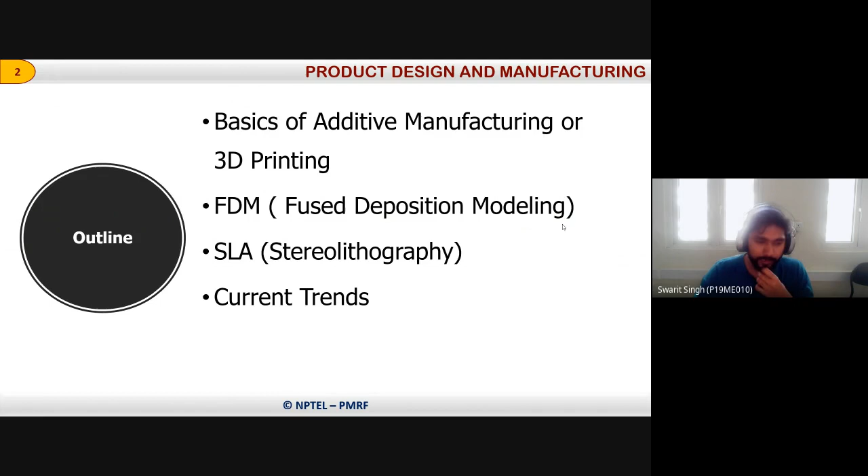So these are the basic outlines I'm going to cover about additive manufacturing. We'll see the basics of additive manufacturing and 3D printing, then what is FDM, fused deposition modeling, which is very common and popular. Then we'll see about SLA, and then the current trends, how the research is going, and what the current market of 3D printing looks like.

The first step involved in additive manufacturing is preparing a CAD model. For preparing the CAD model, you can use any CAD drafting software including SolidWorks, Creo, AutoCAD, or Fusion 360. If you're using an online tool, you can use GrabCAD or OnShape. OnShape is one of the online drafting software which hosts these CAD tools.

The CAD model can also be obtained from 3D scans. If you have any component and want to do reverse engineering, you can scan that component into a 3D model and process it. With the help of 3D scanning, there are different kinds of scanners available, like blue light and white light scanners, which are laser based. They scan the component and create the same part. So it's a reverse engineering kind of thing. If you have a component and need its 3D model, you just scan it and you will get the 3D structure of that particular thing.

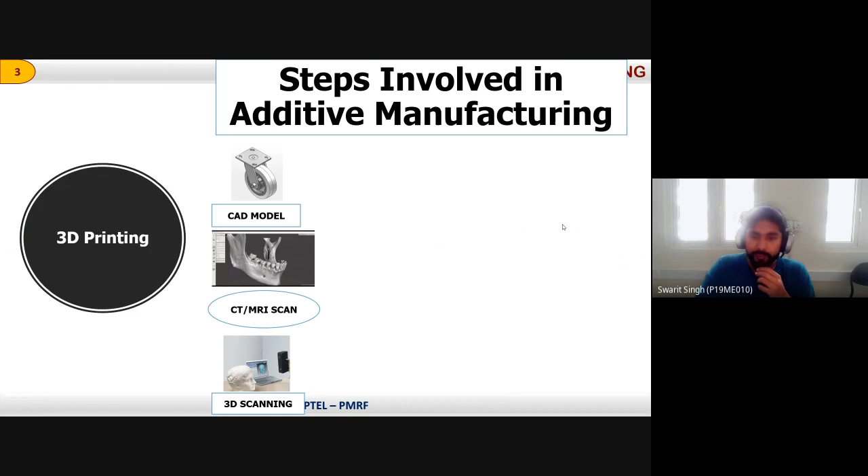Then from there we have to create a tessellation model. There's a file format to save that particular CAD model, and those models are saved in particular formats. For 3D printing, it is required to tessellate the model and save it in an .stl file.

So the file with .stl extension is standardized for usage in 3D printing. Why only that? Because we have to do the slicing of that particular model, since additive manufacturing is a layer by layer manufacturing process.

So we first deposit one layer, then over that we deposit another layer, and so on. Is this done by CAD software like CATIA?

Yes, yes, yes. In any software, when you go to save the model, by default it is something like dot obj. But once you see the save as option, you will find that the dot stl format is there.

Dot stl format is always there in any of the CAD tools. In CATIA also it is there.

So from there, after saving as STL, we slice this model. This slicing is done in the software which comes with the 3D printer, so the slicing is performed there.

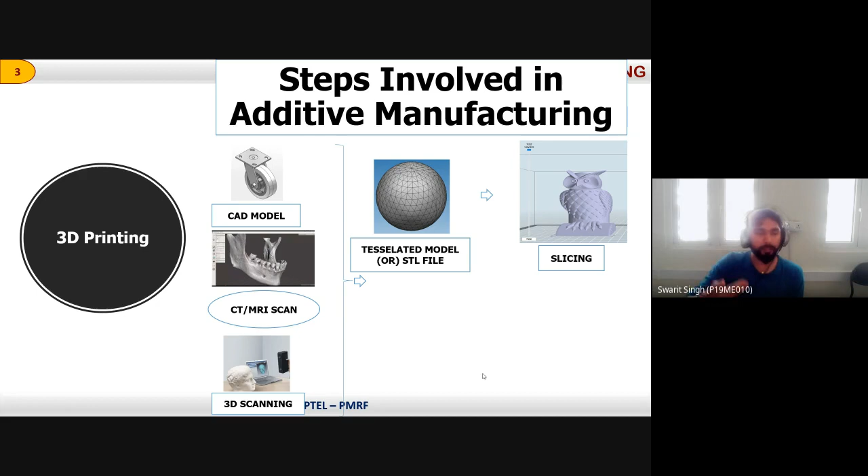Then after slicing, the job is passed to the printer, and it starts printing the component. So this is the overall set of steps involved in any additive manufacturing process.

Then after 3D printing, or after doing the additive manufacturing, we have to do some post processing for final finishing, like removing the support material.

We have to remove any disparity or problem with the printed part. Sometimes extra threads or extra material may be deposited, so we do some small finishing operations to produce the final part. It's a very minimal task.

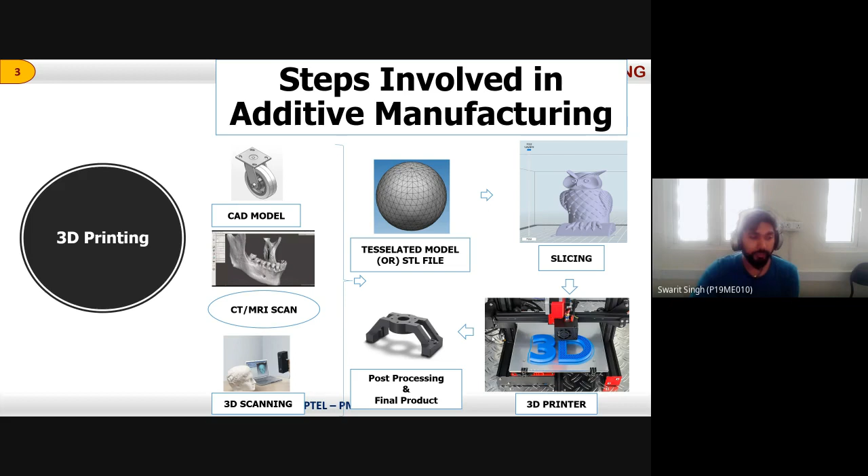Sometimes if the printer is very high end, you do not need to do all these activities. But for making the prototype or component very perfect, we usually do some post processing of the final product.

So as I said, it is a layer by layer manufacturing process. So suppose if you have to manufacture...

Someone has raised their hand.

So if you have to manufacture a component which is a hollow structure, okay, or what kind of structure... let me show you.

Suppose if you have to 3D print this. You can see this feature has a smaller diameter, and this one has more diameter.

This is a larger diameter. Then there is a hole here. This hole, there's a hole here.

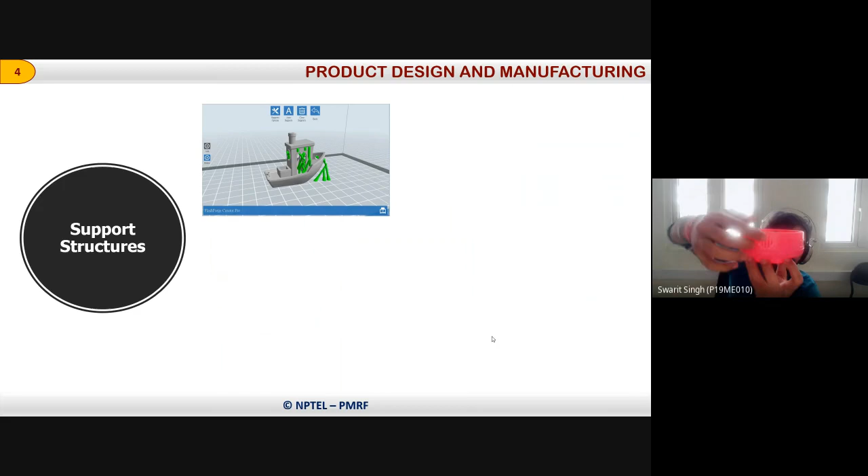So if you go for 3D printing... sir, I think we are on your slide. Are you showing some cursor or something? Yes, yes, yes, it was not visible sir, it was a plain slide.

No, we still cannot see the cursor, sir. No, not the cursor, I'm showing a video. Sir, we are still seeing the slide. That's the problem, so I think you have to share the screen rather than the app.

Okay, now the video is visible, right? Nikhil, you have to pin it correctly so the people are visible. Just see me, is my video visible or not? You have pinned the slide one.

Two of my profiles are there, one is the PPT, which you have pinned so it's only showing that on screen. The next is my video, so just unpin that so it automatically changes from the PPT to my video.

There's a pin option, yes. Now I can see the flask you are showing. So can you please repeat, sir? Sorry.

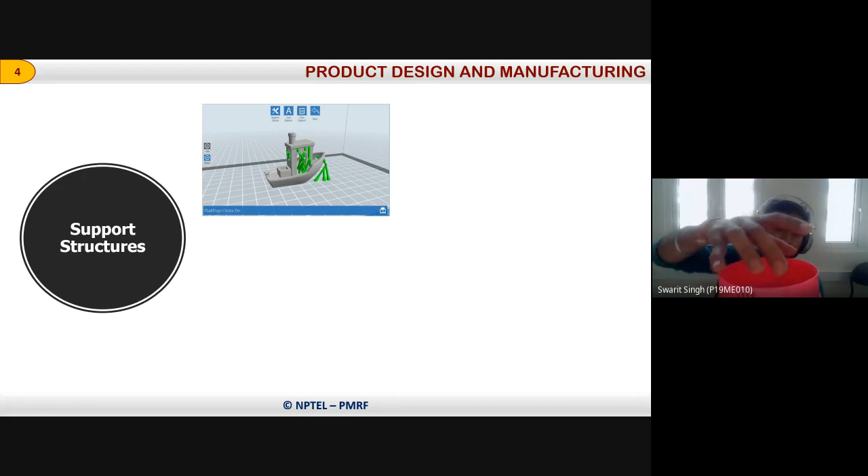So you can see there are certain features here, right? One feature is here, having a small diameter. Then another feature is here, having a larger diameter than this. And then these are the holes, visible here, this is a hole.

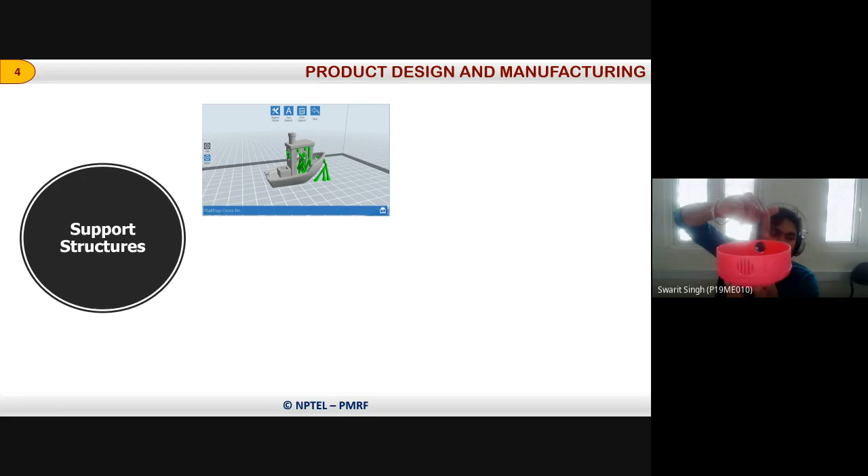So if you make a CAD model for this and pass it to an additive manufacturing machine or 3D printer, it will start printing. It is a layer by layer manufacturing. So it will first print this particular layer, then over that it will print another layer, because we have sliced it.

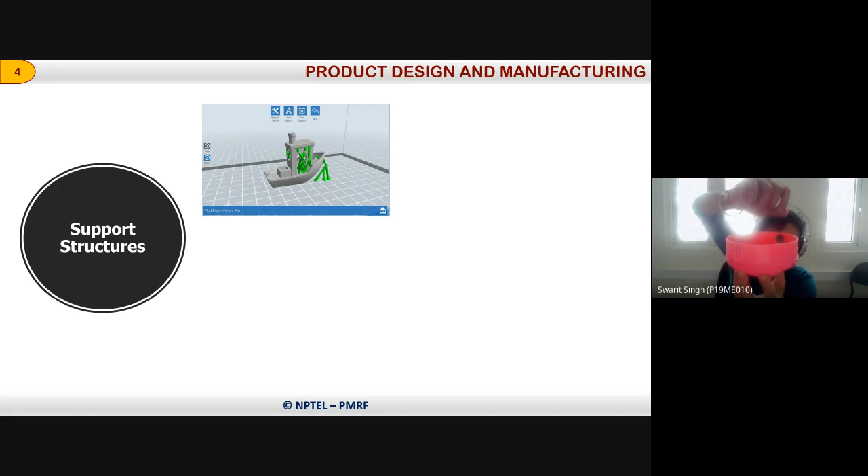Once it comes here, there is a whole overhanging part. This is the overhanging part. It's just like a nozzle, something we are dropping from the nozzle and it is getting deposited on a surface. But here there is no base, so it will again drop at this bottom level, and it will start depositing the model here only.

But when we do additive manufacturing in 3D, this does not happen. So what happens here is there are two kinds of material in any printer: one is the support material, and the other is the main material - the material of the component which we are going to use for manufacturing our component.

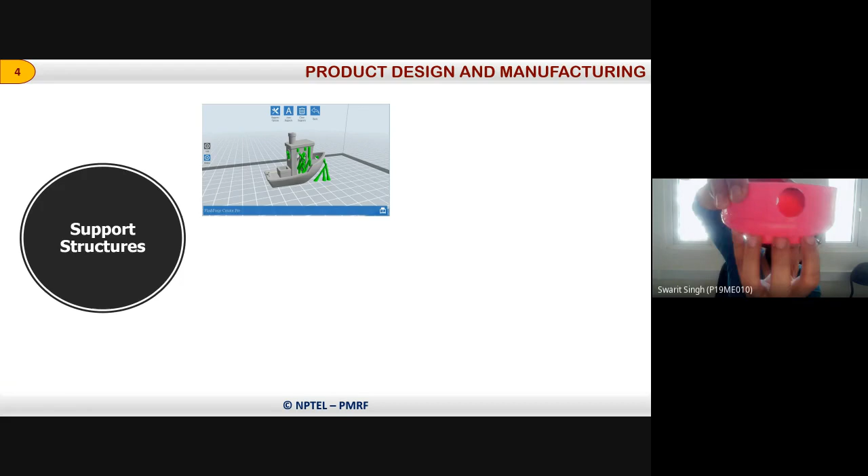So at the part where support is required - here what we require is support, some support up to the final level of this structure, this smaller diameter shape. So up to here, this part will be printed as support structure.

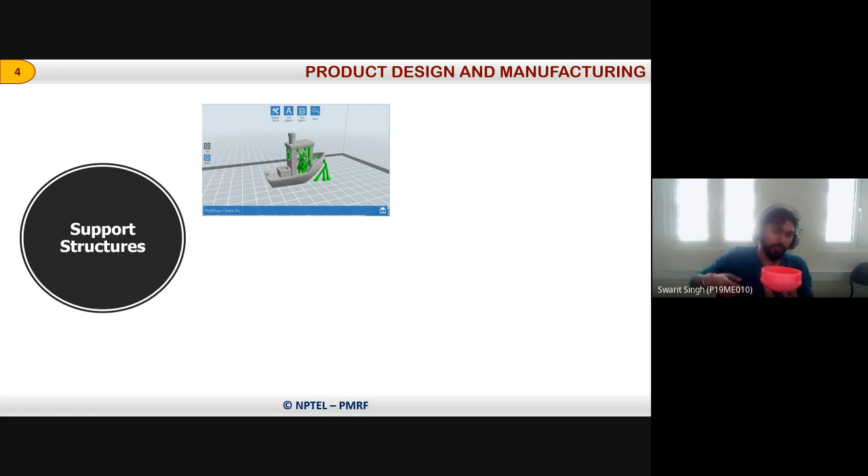So when you see the printing of this, you'll find that the outer circle will be with the support structure and the inner circle will be the main material, up to a certain height. Then the main material will come into action and print. Later on we'll remove that support material and get this kind of shape, right?

So did you understand what I'm explaining, how it happens in the 3D printer? Or is there any confusion still remaining? Hello.

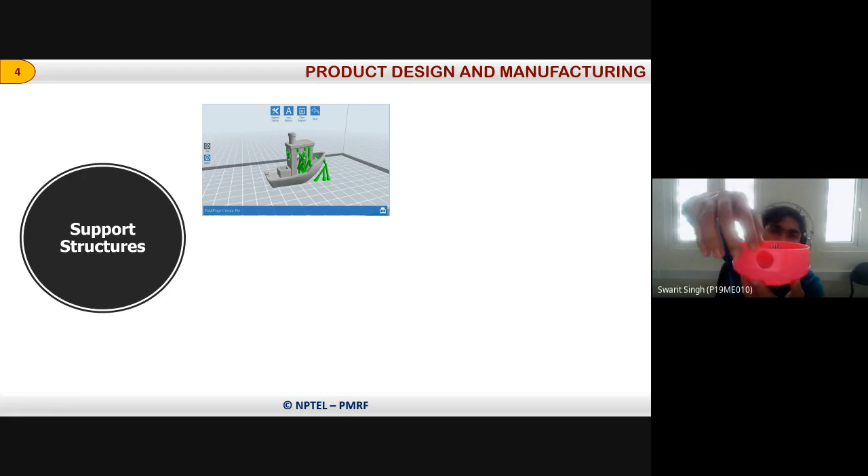No confusion, sir. Okay, so the same problem will happen here, this part. Again, we are depositing at this layer. So what will happen after depositing at this height? There is some hollow structure. So how will you go to print this? If again the nozzle comes here, it will drop the material down because there is a hollow structure.

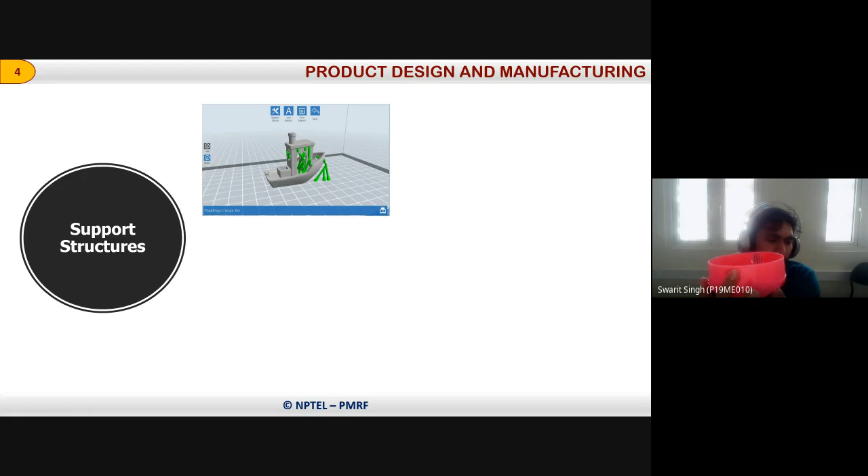So for this also the support material will be here. It will be filled with the support material, and then the main material will come here, and later on we'll remove the support material, right?

So how will we remove that circle, like the support material? The support material is very easy, you can break it with the help of some tool. It will not be stuck with the main material - it is a mesh kind of structure, just for support, not very strong.

Strength wise, no? Yeah, strength wise, it will be very porous kind of powder structure. Sir, can we reuse it also for the next print? No, so that will be a wastage.

People are doing research nowadays to reutilize that. In IIT Gandhinagar, one of my friends is there - he's building some technique so that all the wastage, like in 3D printing the wastage in terms of support material is very high, can be recycled and then used again for another printing operation or something like that.

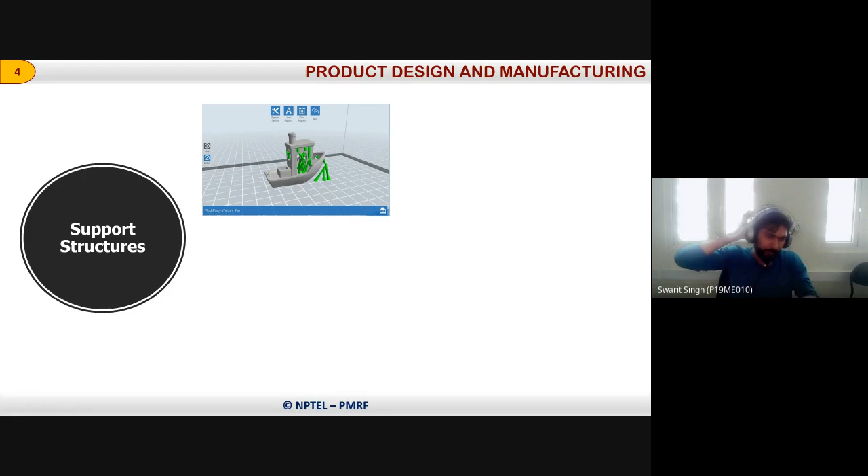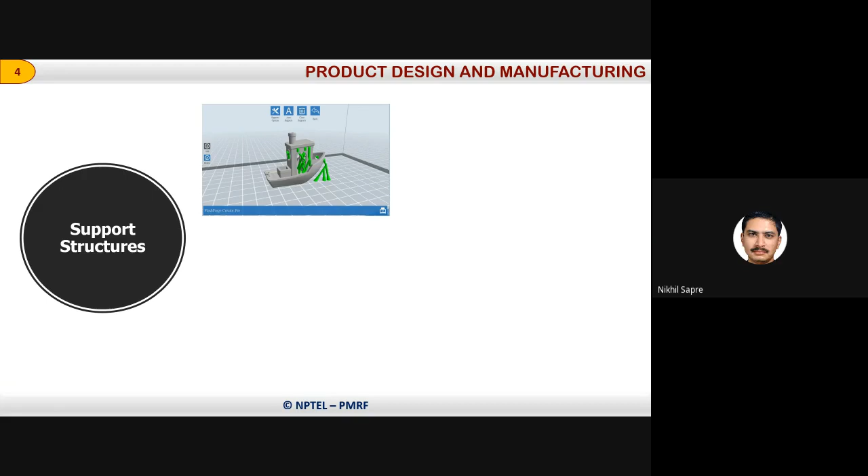Ideally sir, support material can be something which is not very costly, like even sand kind of material, so that even if it's wasted it's not a big loss. Yeah, so people are doing some research in this field.

While making structures for civil architecture, like chairs and tables, there is recently news of researchers from IIT Guwahati - again one of my juniors - they have incubated a startup from IIT Guwahati, and he is pursuing his PhD from there.

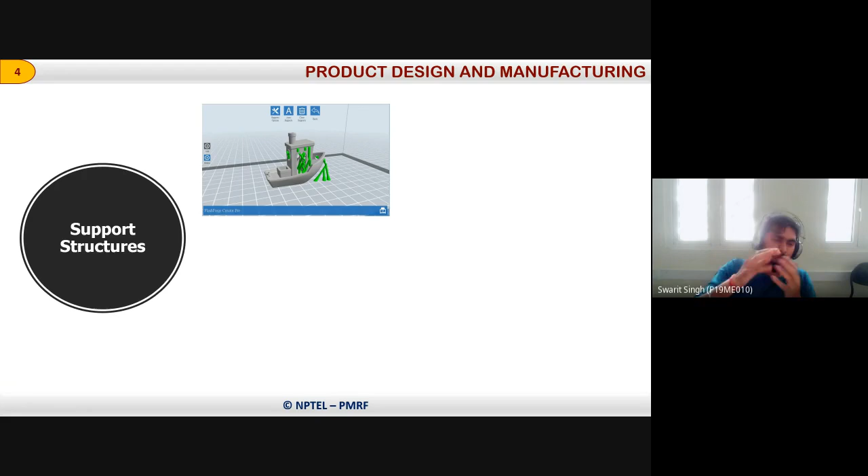So he with his friend and some other faculty members have built the concrete structure. There they have used this sand kind of thing for support material in those kind of applications.

For this ABS, people use that plastic only. Low cost plastics are there, like ABS materials. So for that, support structures are required. Here in the figure also you can see, if you have to print this kind of overhanging parts, the green parts are the support structures or support materials deposited there.

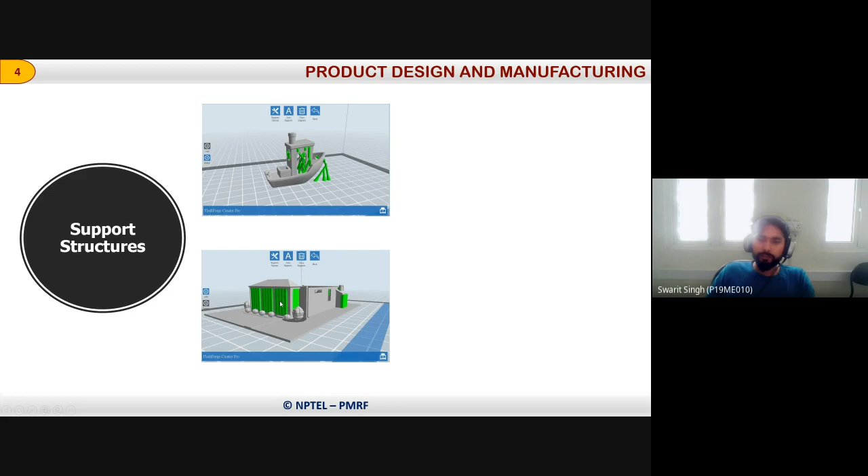Here you can see when you are making a model for home, for windows, for these pillars, these green materials are the support material that is printed, and rest are the final original materials.

That support material needs to be removed after the part is completed and cools. It is not easy to remove - once the part is completed, after taking the part out, you can just remove it, but it becomes difficult later on because it gets solidified. There are certain tools which are supplied with the machine only.

Some similar tools that people use for pedicure, manicure - those small instruments are there, so you have to just do extra effort, extra work for removing that, but it definitely gets removed.

So this kind of structure is initially printed, and then later on we just remove this kind of structure. These are the support structures. We just break it and rub it with the tools that we have, and then we get the final product.

Next, there's a slicing process. Similar slicing process you can see at your home - suppose you take a potato and then chop it. So similar kind of slicing process is this software does with the CAD model that we supply. We provide the CAD model and they slice it in layers.

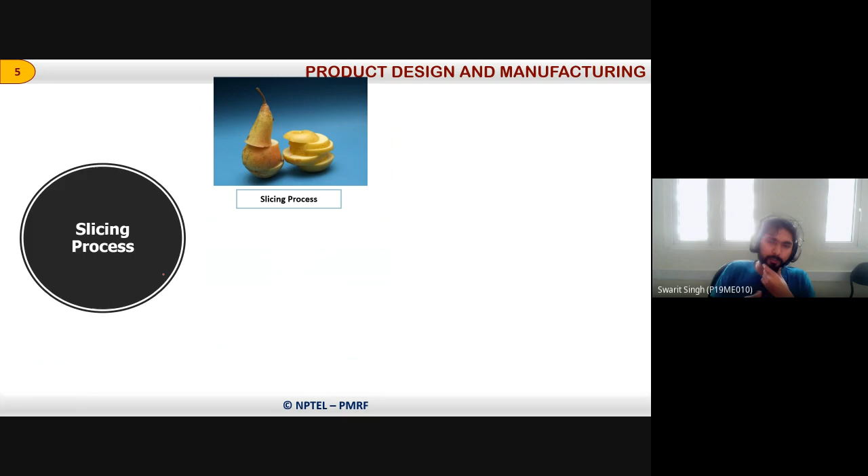There's a CAD model, and it is sliced from here - one slice, two slice - this slicing is very small. The gap between the slicing is very small, but it is sliced in certain slices.

Then automatically the software takes the path, notes down the path where it has to deposit the material, and then the sliced model is sent to the printer.

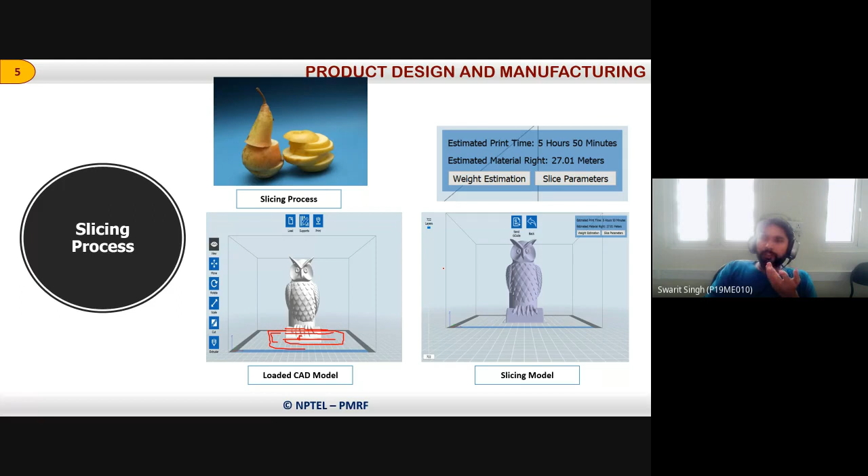Before sending it to the printer, the software is capable of estimating the time, estimating the material - like how much support material is required, how much main material is required, and like this. Then weight estimation and everything should be done.

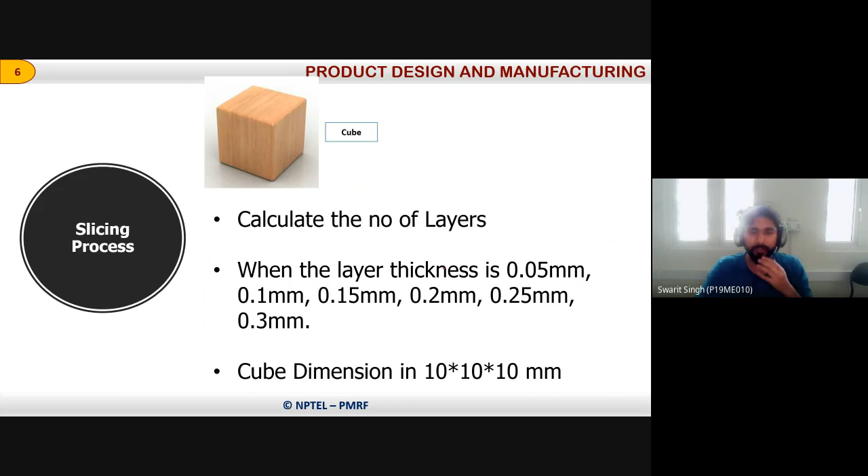Then we have to calculate the number of layers and thickness of the layer. More fine layers means the appearance of the object or component will be high, and then we require a more precise printer for that. So based on the application, we choose the layer thickness - it depends. And based on time also, if we want to complete the part as early as possible, we have to increase the thickness of slicing.

This transformation we have to do as per requirement. Every time it is not required, but if we are going to use this 3D printed component as a final product, then you have to do some post processing. Otherwise, if it is only for prototyping, then this 3D printed part is only fine, right?

Next, the very popular FDM technique - fused deposition modeling. This is a type of additive manufacturing technique. Most of the printers, if you search on the internet, on Google, you will find this kind of printer for less than 30,000, or maybe less than 20,000 only - those are FDM printers.

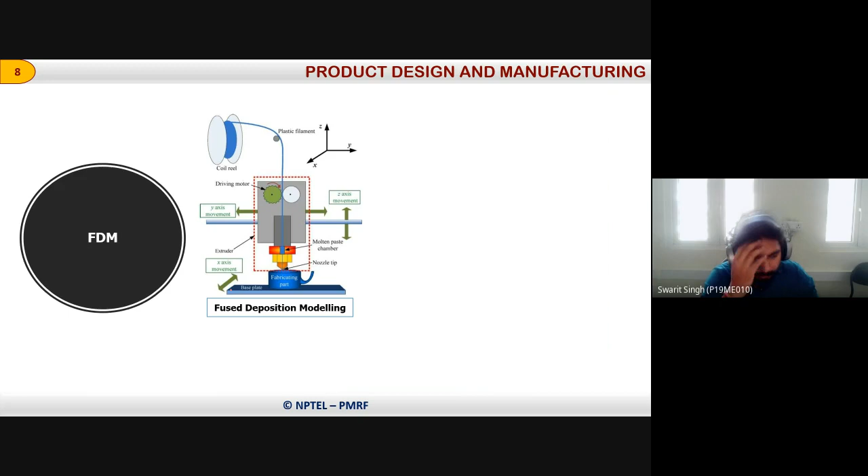They use this material in form of a reel - reels of this ABS material, this kind of plastics. It is fed to the nozzle. Before the nozzle there is a heater - this band heater is there which heats that material. And up to what temperature we have to heat that material?

Melting point - it's about 0.5 degrees Celsius more than melting point. Why 0.5 degree more? Because it should be in molten state so that it can easily flow and be deposited in layers, so it's easily able to construct it. After coming from the nozzle, it does not instantly get cooled. It comes in the zone of melting temperature because it has to pass the band heaters and then travel this distance, so we have to give some extra heat to it so that the cooling process accounts for this.

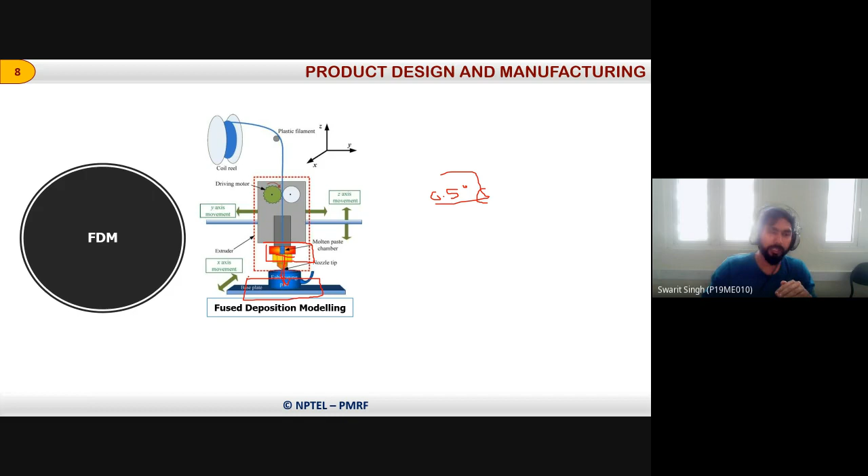Then there's a base plate also in every printer, a standard base plate over which this material is going to deposit. It is a property of that base material that this material does not get stuck with it.

So in some printers, to solve this issue of the original material sticking with the base material, first a very fine, porous layer of support material is deposited, and then the model starts building over that. This way it is easy to break and separate the base plate from the fabricated 3D printed component. So this FDM is very popular, and this is a typical structure.

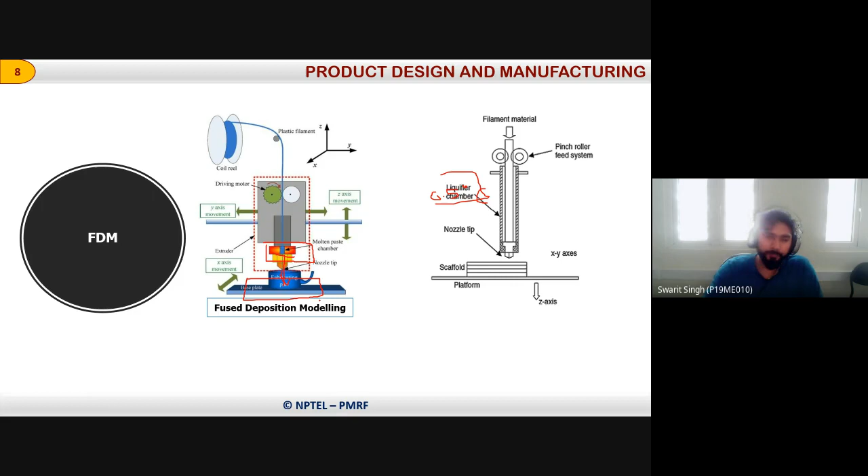In India, there are a lot of researchers who have made their own kind of FDM printers. Some have used pellets - this is what they did.

Instead of providing the material in form of a coil, they created material in the form of pellets - small balls, very small balls of this material, called pellets. Then they feed the pellets into a hopper kind of structure, and again there is a heater which melts those pellet balls, and then the same deposition process is performed. So there are lots of people who do this kind of research, and they play with the material and its properties.

So instead of filament, they are putting ball kinds of structures - spherical, pellet-like. It's a very tiny, tiny particle of the plastic or the material.

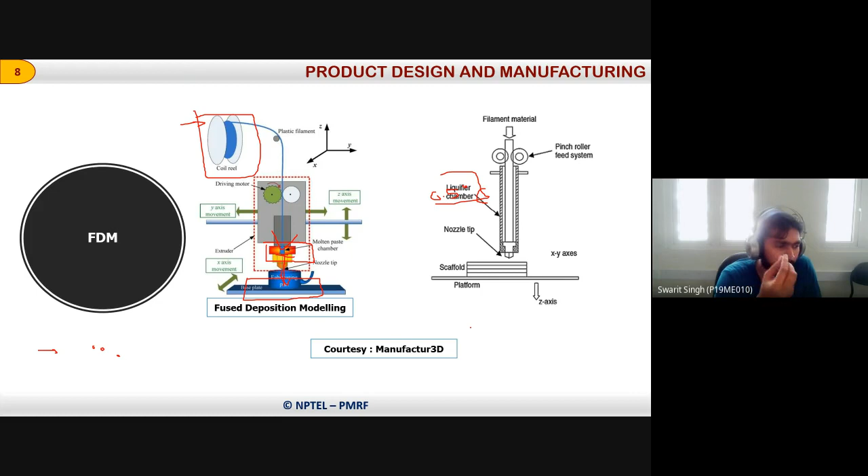Sometimes it's commercially available in the market now since it has become popular. But suppose sometimes you want to print some specific material with the property that you want - so you have to make it yourself.

You mix some powders, melt it, and then make it in the form of small pellets that you can cut. It basically looks like sabudana - small balls, just like sabudana. So you prepare that same kind of material for any specific material, feed it to the hopper, print it, and then perform the testing and everything.

So this kind of structure is printed with the help of this FDM printer. I have one structure I can show you.

So these are all the parts that we have printed with the help of the 3D printer that we have. This is one, then this kind of bell you can see - for this, inside there was the support material base. These are all the components printed for demonstration in the additive manufacturing laboratory for undergraduate students. This you can print - there's a keychain kind of thing, with the roll number of the student.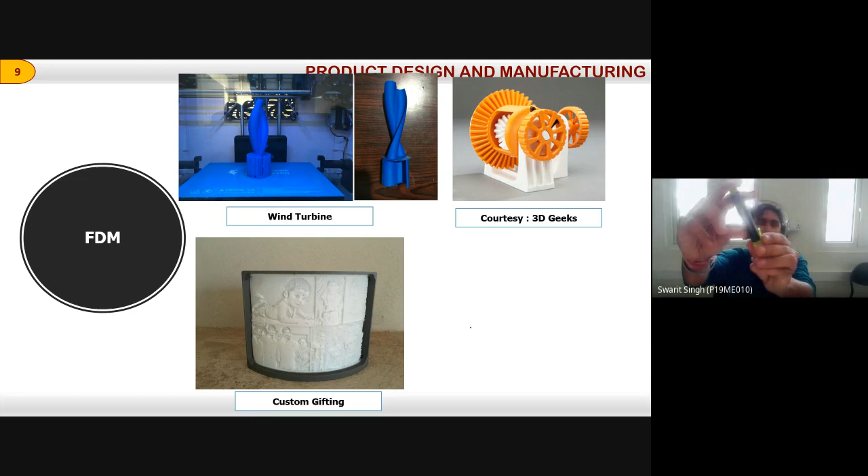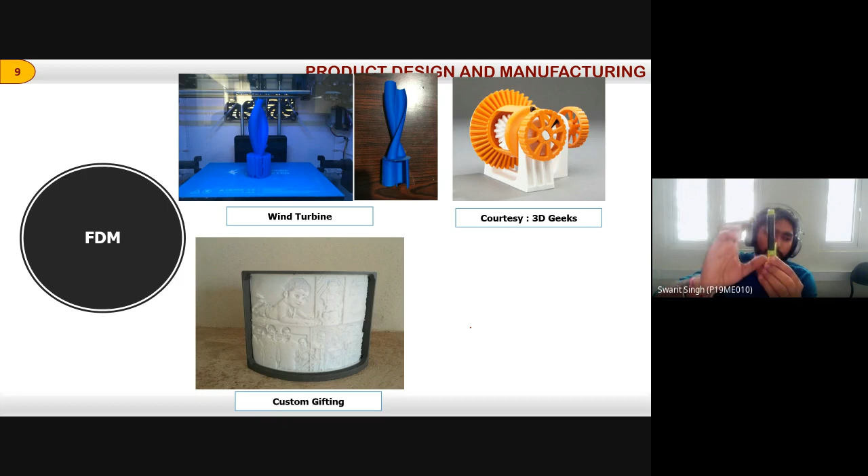Yes, because here comes the mechanics. If we print it like this, there are chances of bending this structure, because it is getting deposited, and there may be some load while cooling. After printing, the cooling of that material will happen, so if it is non-uniform, it will bend, and then again it will be printed layer by layer, with different numbers of slices.

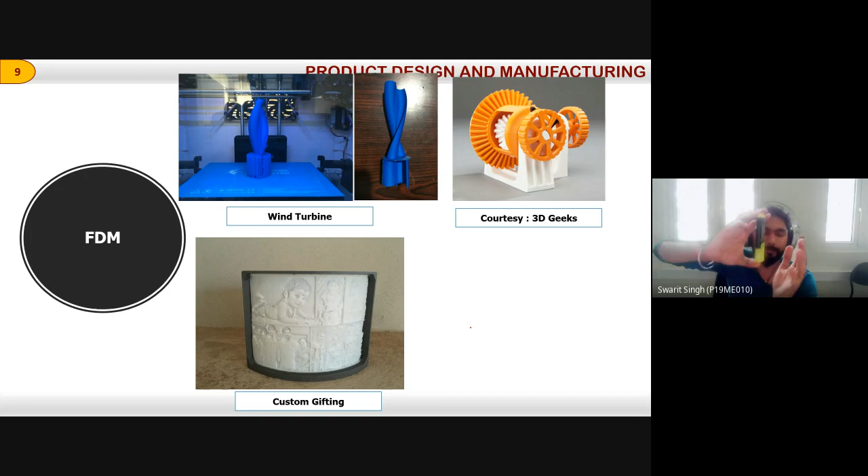It will now consume more time - no, not in terms of time, in terms of strength. If you're cutting it like this, you have to slice it this way; if you're printing it like this, you have to slice it that way. Here you have to slice it into maybe 10 more parts, but here you'll be done with two or three layers. Maybe 20 versus 100 - that will be the ratio. So this is the thing, and then it depends on the application of the component you are going to use.

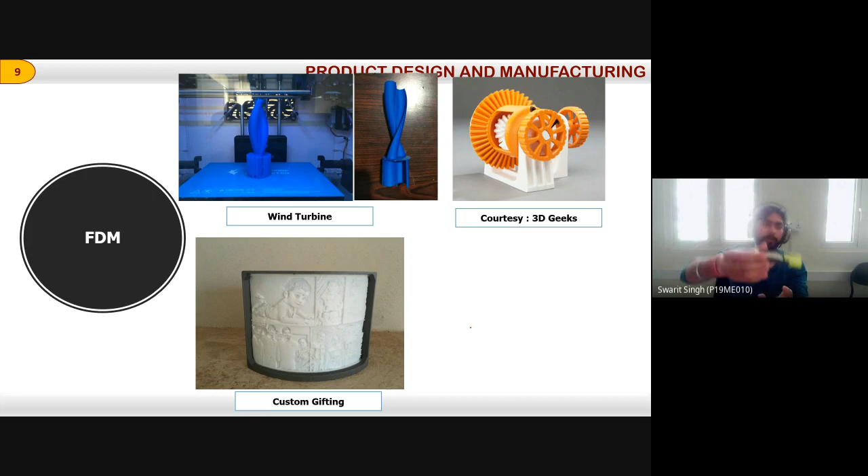Now suppose the same cube you have to use for compressive load, so at these two ends the loads are applied. If you print this component in horizontal orientation, it will easily break in compression because it has less compressive strength. Yes, according to the strands of the orientation, we have to select the orientation as per the application.

So if it is going for tensile testing, tension, tensile load at the ends, then we will definitely not print in this orientation, we have to print in this other orientation. But if it is going for compressive load, we do not print in this orientation, we have to print it in this orientation.

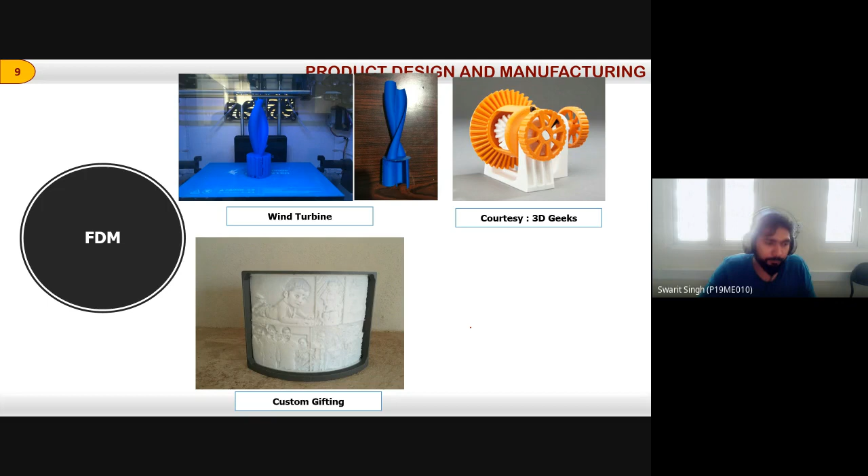So these are the process optimization research that people used to do before performing prototyping and manufacturing of components. I hope you are getting some more insights about additive manufacturing with all this, since we are spending more time here.

Next, you can see lots of components we can print - maybe a model of a wind turbine, some 3D Geeks model, and also for customized gifting purpose. This customized gifting is one recent example we have printed, during COVID time.

When there was COVID, the college was not able to host the convocation to give degrees to their students. So in my college we made a sample for that gifting - there's a photo of our director giving a degree to the photo of the student, and the face of the student was taken from their original picture.

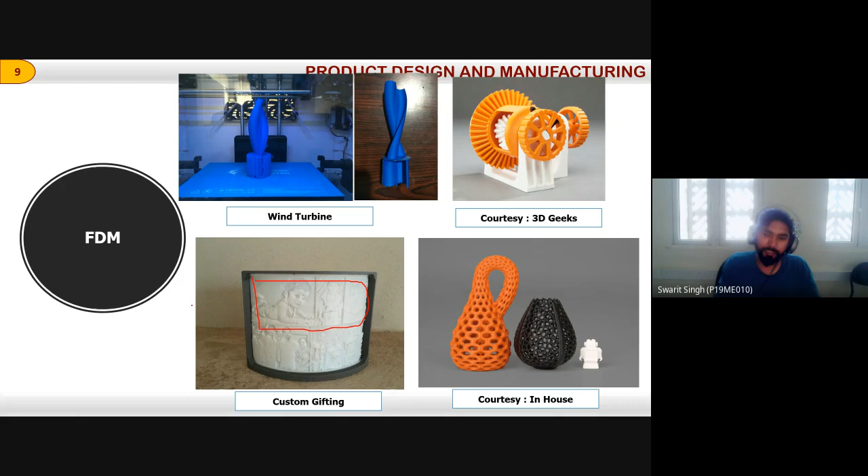So it is printed, and after printing we put a light at the backside of this structure - it was very similar, though I don't have it right now with me, something like this only. So from the photo we created the 3D model, printed it, and after placing light behind it, it glows.

It was a very unique kind of thing that we showed, and then it was given to 3D manufacturers. Because the order was in bulk, the order was given to prepare it for all the students. This was a gifting idea which we got from this kind of 3D printing thing.

For our lab also we have this kind of thing, but it is not currently with me - maybe next time I will find it and show you. So these are gifting applications we can do based on the application.

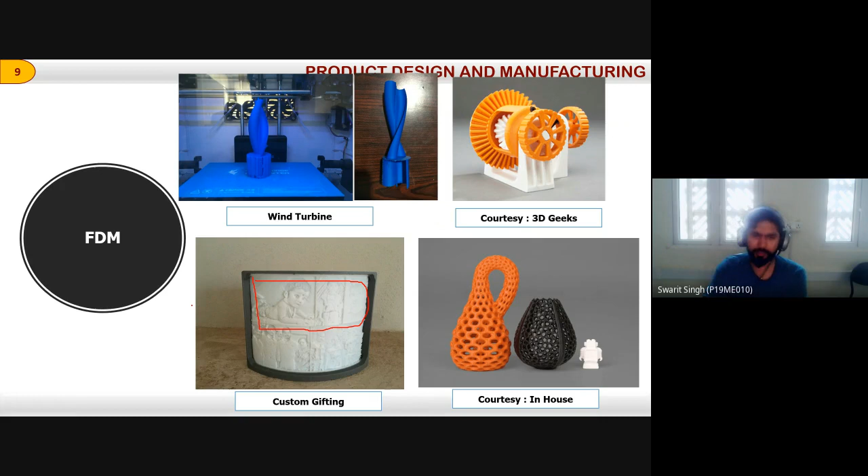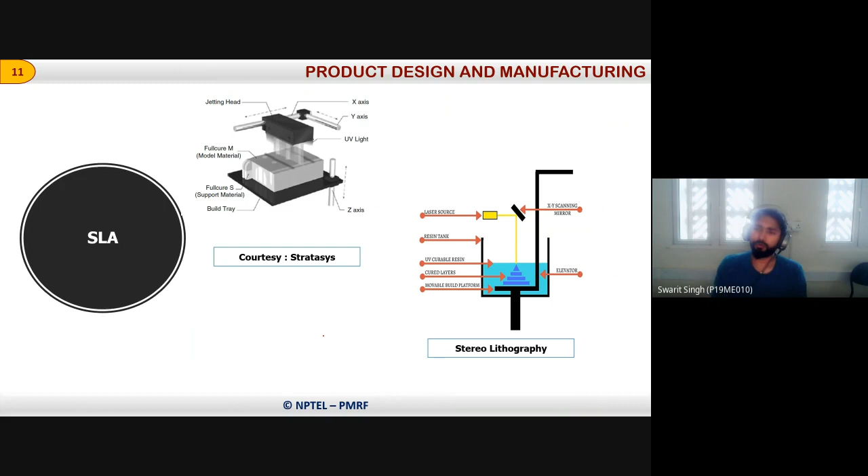Another important additive manufacturing process which is more popular in industrial applications is SLA based. With the help of laser, there's a resin tank, and the resins are solidified with the help of laser. This kind of structure is basically printed with the help of SLA, and typical structures which are not prominently printed by FDM, we can easily print with this SLA process.

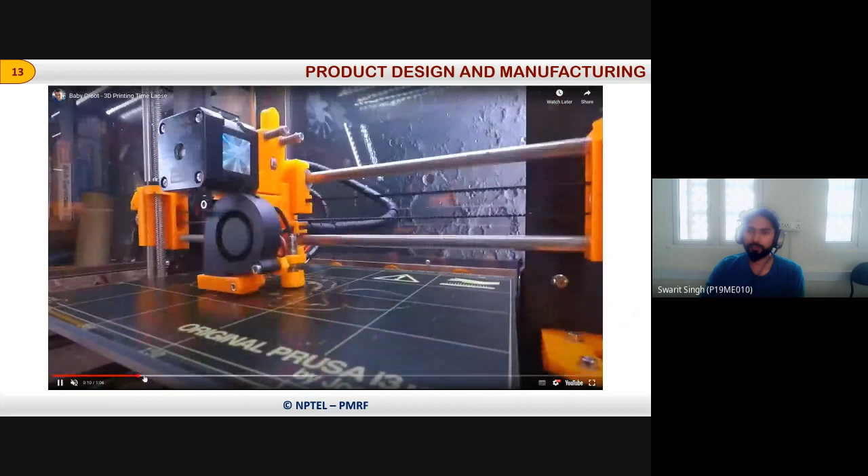Here is a video - maybe some of you have already seen the additive manufacturing process, but I am showing you one video in a fast forward manner. It is on YouTube, I have selected it from there. This is the printing of this particular structure, you can find this kind of printer. It's a fast forward video, but this is not the actual speed at which it printed.

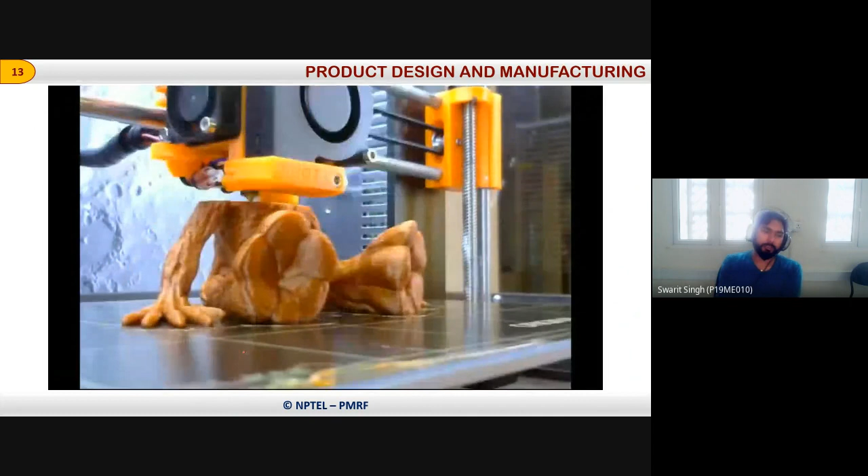This is the board, and this is the material coil where material is there, and the nozzle is printing it. Sometimes what happens is the part is not properly formed because there is a certain issue - just see the video.

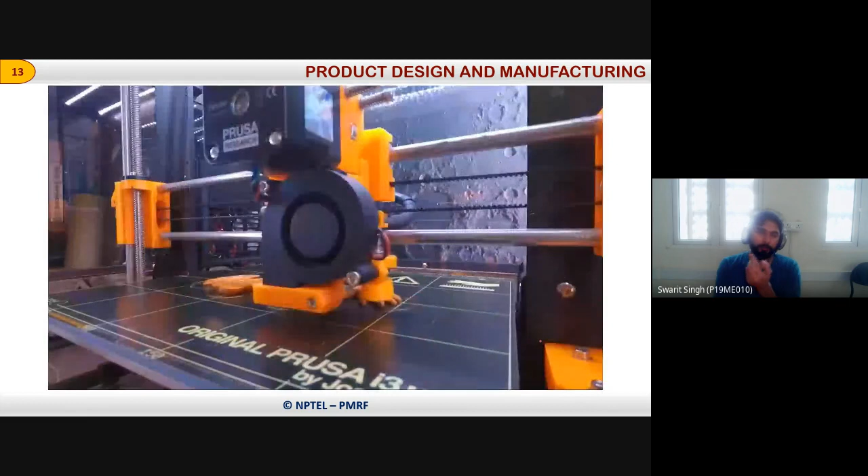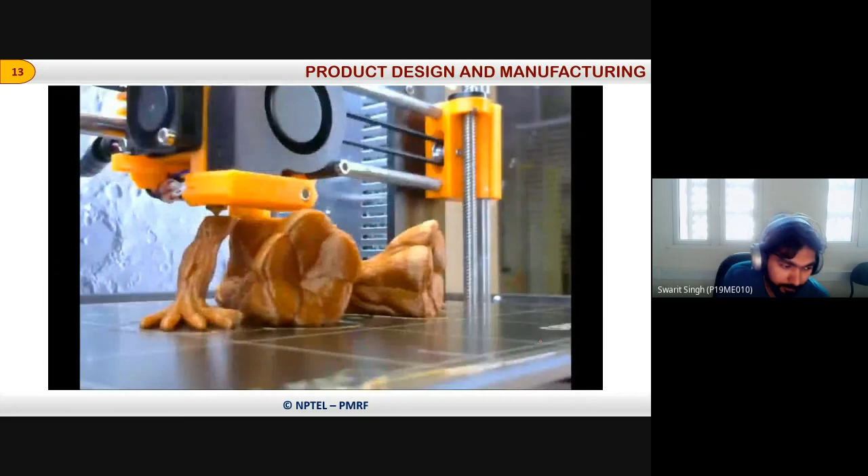DIY activities are now very much popular, so people purchase this kind of printer for their DIY activities. These activities are very common now. Sometimes the parts are very large, in terms of being out of the capacity of the machine, that particular 3D printer.

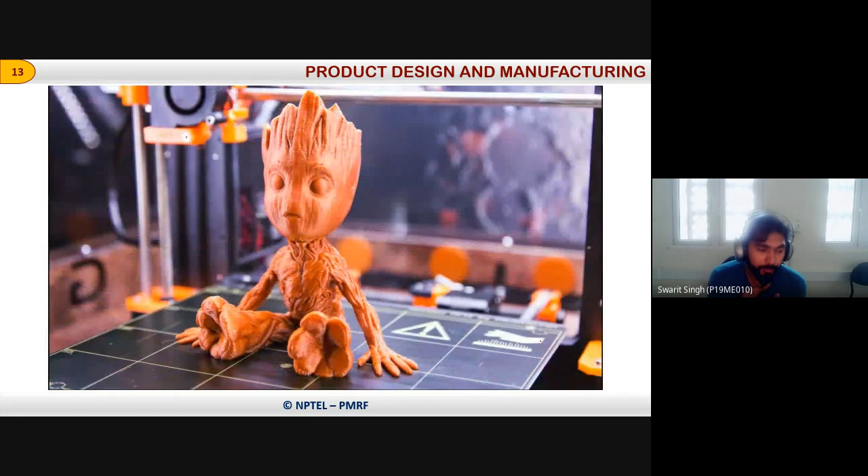So we have to build the component in different parts, and then we have to assemble it. Like this, the half part was printed separately, and another head was printed separately, and then it was pasted together with the help of some glue or something like that.

The surprising part was that if you see the way he printed the head, despite this, he didn't require a support, even though it's going from neck to head, like it's reverse. But still, at least in the video, he hasn't shown a support.

So it is not like that. The printer manufacturing companies are researching optimization of this support material. One idea, like Muskan said, is to use the same material in a porous manner. Another is to remove that support material and make the nozzle deposit the material in such a way that it does not require any support material.

So this kind of structure can be printed without support material. How? Just like reverse, changing orientation is another thing, but if you very minutely increase the width - the overhanging deviation - if it is very small, it will not require that support material at all.

So this kind of optimization is what 3D printer manufacturers are doing and encompassing in their printers.

Moving to our next part, now we are going to cover week number 10. The course content of week 10 was basically based on the plant layout. In this week, layout of the plant has been discussed.

You make a comprehensive plant layout so that for any further changes - you will start with manufacturing one component, later on shift to another, or want to produce a similar component, or upgrade your product - there will be design changes and all, so your plant layout must accommodate all those design changes.

Then expansion of the enterprises - today you are starting with a base amount of maybe 1 crore, and after 5 or 10 years, after gaining much, you want to invest more and expand your enterprise in terms of capacity. So this plant layout will be made such that it can be expanded.

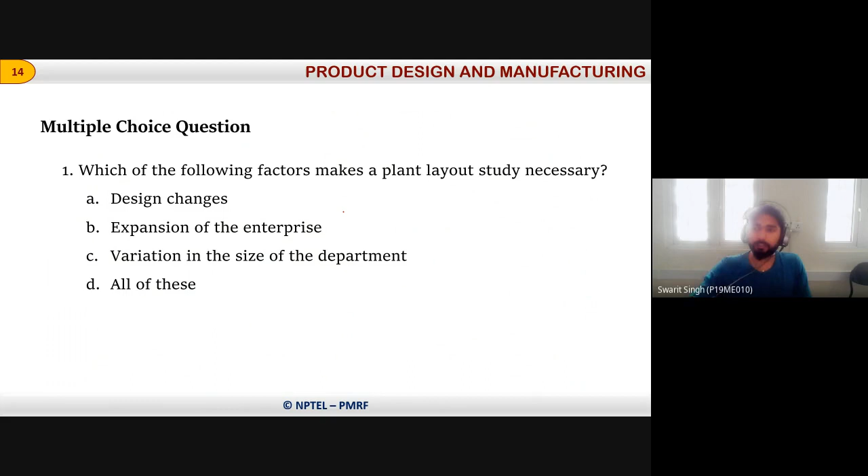So the answer is all of these. Next question two: a plant layout design is affected by processing time, product physical characteristics, intricacy of the product, or all of these. So what are the factors which affect the plant layout design?

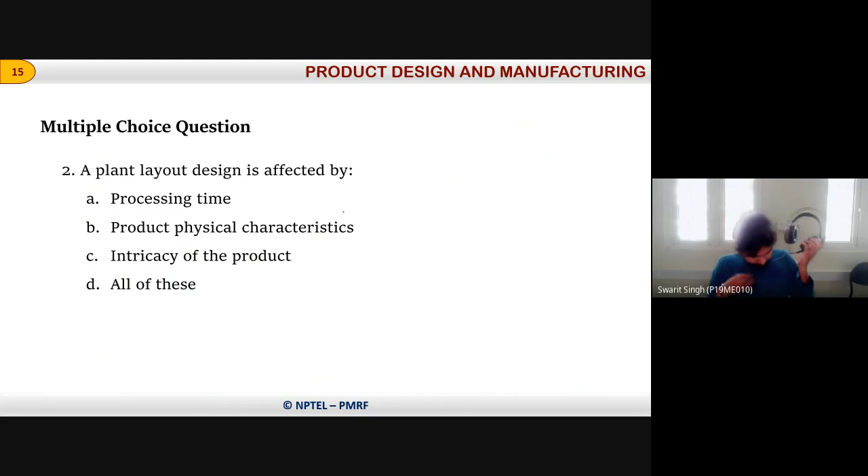Yes, so again, the answer will be all of these. The plant layout is always affected by the processing time of the product, the physical characteristics of the product, and the intricacy of the product. So all these factors affect the plant layout design.

Next question is a true or false type question. It says functional layout gives the firm the flexibility expected to deal with an assortment of routes and process prerequisites. Is it a true statement or a false statement?

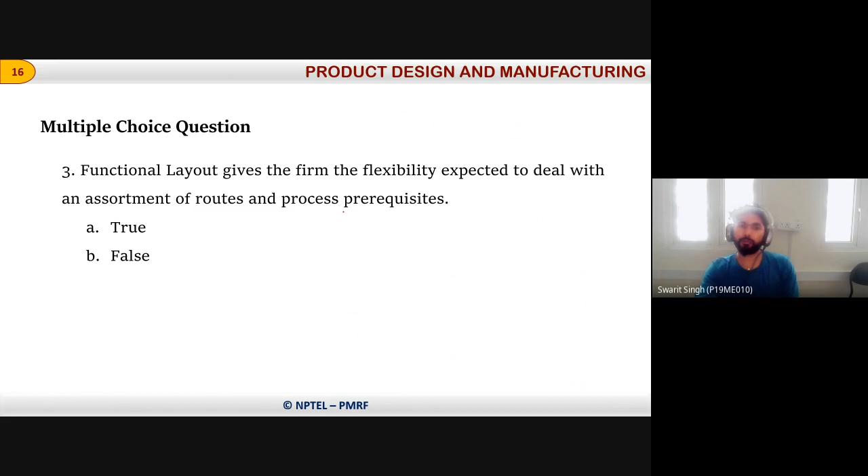Yes, so it is a true statement. Functional layout is meant for giving flexibility inside the firm in terms of the process, the routes, and the production of that particular product. So this is a true statement only.

Next, question number four: what are the disadvantages of a process layout? So before this, the process layout is one of the types of layout which can be followed in the industry. Based on the process, there are three kinds of layouts.

So those layouts are process or functional layout, and product or line layout. In process or functional layout, what is there? There is a factory shop floor, and certain kinds of processes are grouped.

Suppose there is one part where the operation of drilling is there. At another part there is cutting or milling. Another part there is turning operation going on, and another there is assembly operation going on. Another section is for inspection of the produced component. So this kind of layout is a process or functional layout, where according to the functions, the areas are separately divided and the layout is prepared in such a manner.

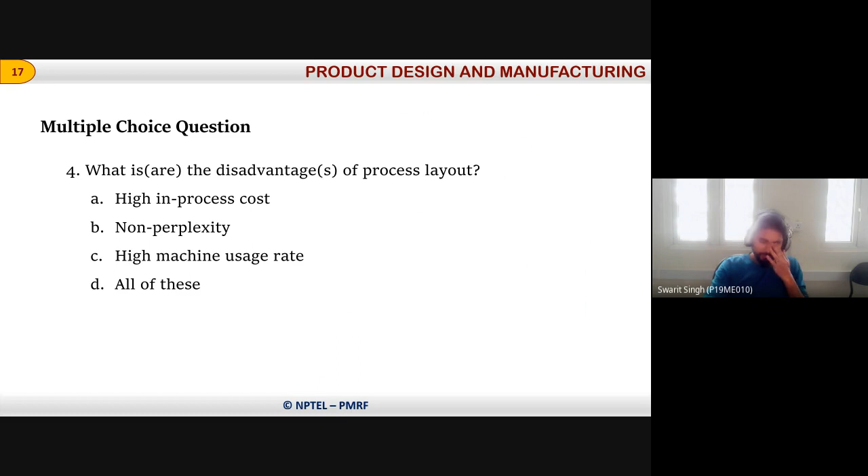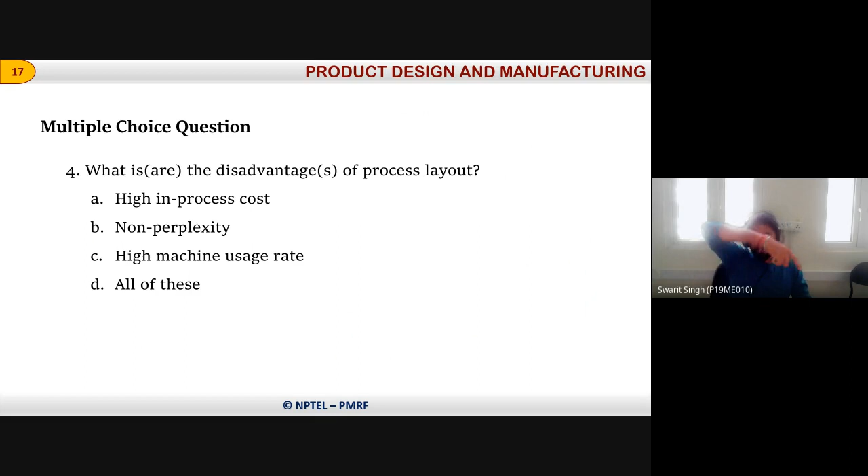And then recently there's a newer kind of technique, a rotatory kind of layout, to process based on requirement. It is in the same loop, and based on requirement, the raw material is processed at different layers, different places.

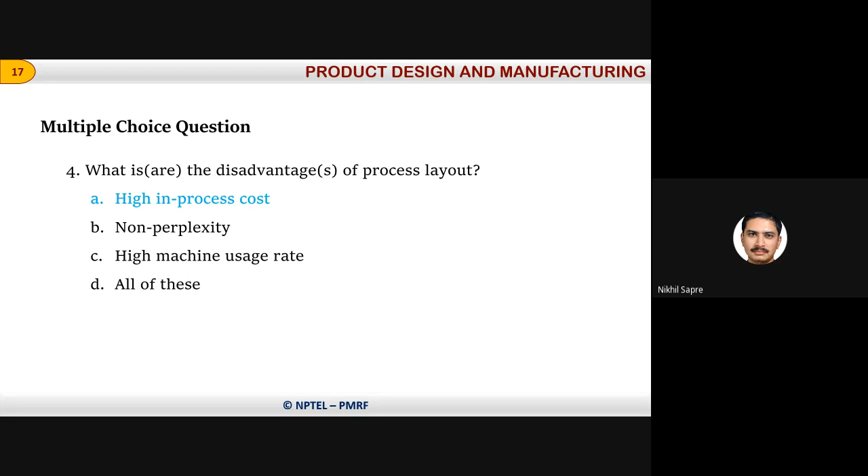Sir, what is non-perplexity? I really don't know this, it's also a new term. I just forgot to look into what that is. No problem, no problem, just give me a minute, I'll check on that.

It is a measurement of how well is the overall efficiency of that layout. So it is efficiency in a way. Perplexity is like efficiency - higher efficiency means the layout is having higher perplexity. So lower perplexity means it is having lesser efficiency.

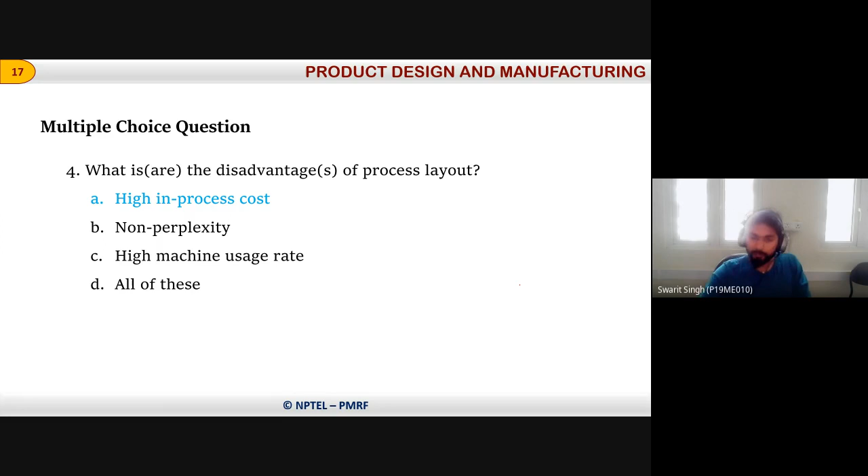In the product or line based layout, raw material enters from one end of the layout, and once it exits from the final end, there is a final product. In between, there are two kinds of lines: unpaced and paced. Paced means it is already programmed with the help of mechanical structures or control lines - the component will remain at one station for 5 minutes, then move forward to another station for 5 minutes, then another move for 5 minutes. So it is automatically taking the component from one end to another end.

Meanwhile, when the component arrives at a particular station, the operators are supposed to complete their part of the task by doing all the operations there - this is the paced one. The unpaced one is like the component arrives at one station, the operator takes his time to perform the task, and once the task is completed, he pushes it forward. So the answer for this question is paced line.

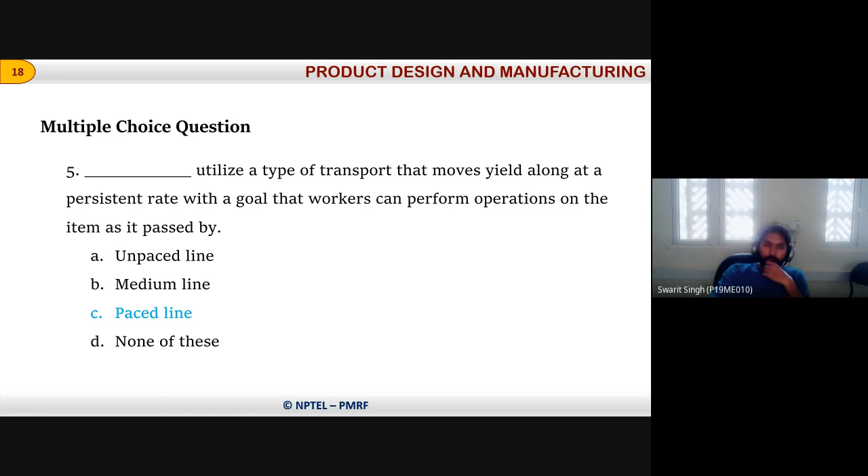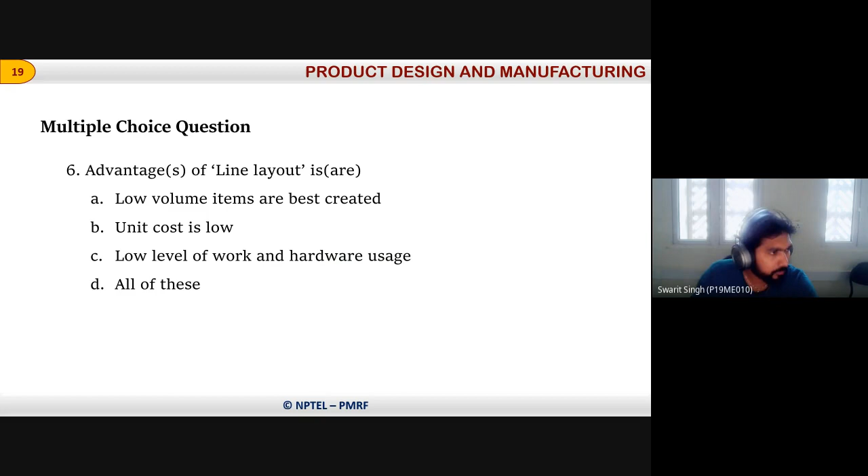Question number 6 is on the screen. It says advantages are: low volume items are best created for line layout, unit cost is low, low level of work and hardware usage, or all of these.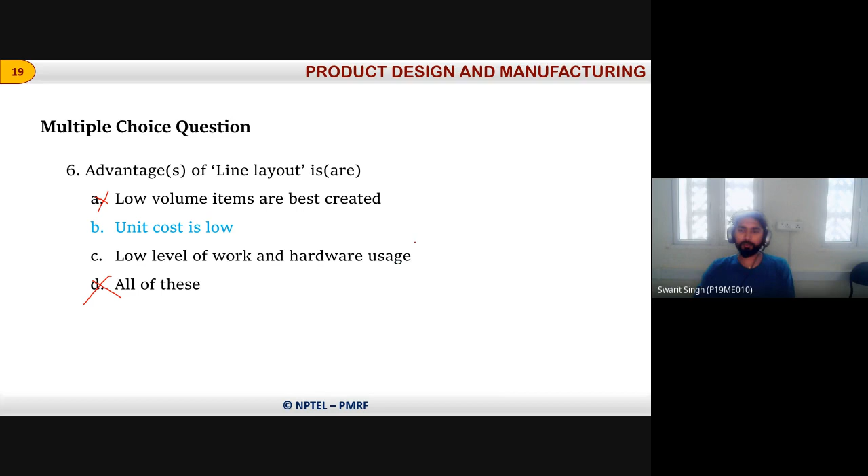For this line layout, low volume items are best created - no, it is not there because it is only for high volume, so this option is eliminated. Then there are two options: unit cost is low, and low level of work and hardware usage. No, hardware and workers are more employed in the line layout, so only low cost of that particular item is there. This line layout is always preferred for mass manufacturing of components.

Question number 7: this type of layout is followed by a hospital. I think cellular - no, no, sorry. So it is like fixed position layout. Why fixed position layout?

Suppose there is a patient who goes to the hospital, then there is a bed which has all the required things like the saline part that we give, and oxygen kind of thing, and ECG monitoring system - all this, the bed and everything is there at a particular position. We just bring the human, the patient. In manufacturing terms, we bring the raw material and build it at that particular position only. Similarly, we bring the patient and treat them, so it is a fixed layout position.

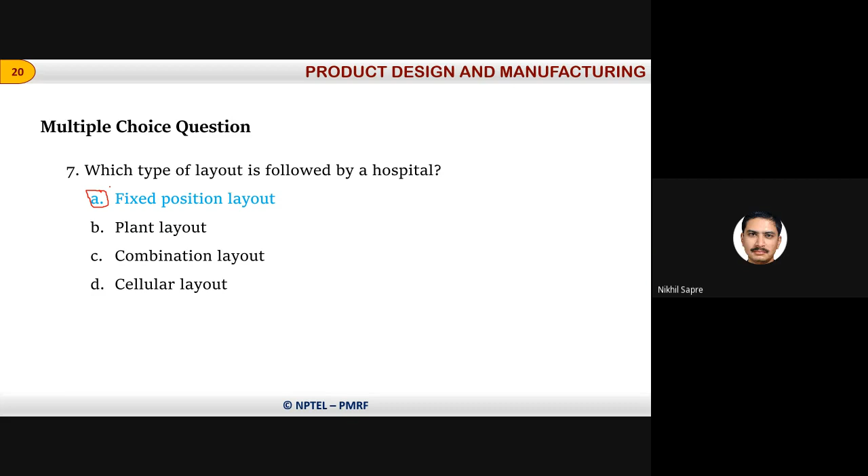So in cellular, what is there? All the lines are in a close common vicinity, similar machines in similar groups - all the machines are in a group. If there's a center table, like suppose on a dining table you are sitting, all the foods are there, and you want to eat some food that is with people sitting in front of you, you just rotate the table and get that.

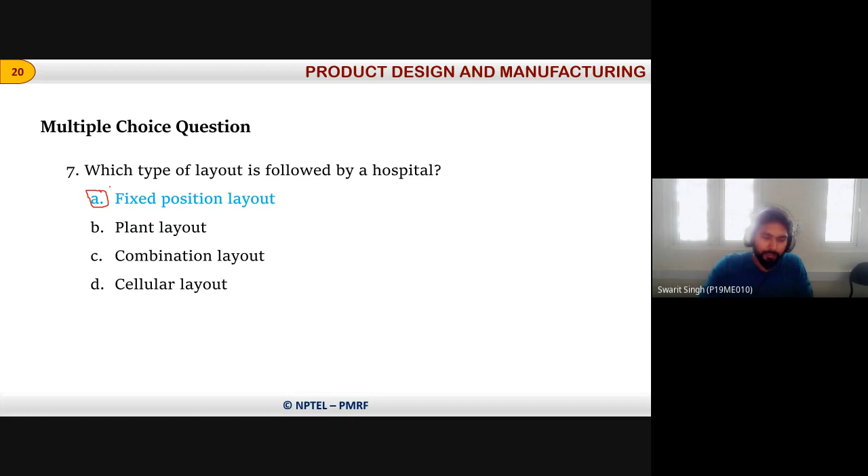So that is the cellular layout - the components are at the center, and around it the operations are performed. Suppose one operation is performed at point one, then it is required to be performed at point three - if it is line based, you have to skip point two and then go. But here, motion can rotate in anti-clockwise and clockwise both, so it will be easier in cellular layout.

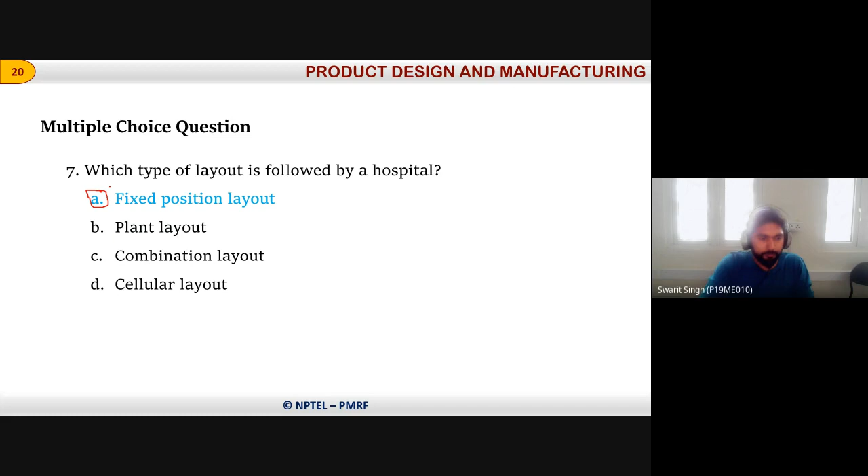See, huh. Yes, Muskan?

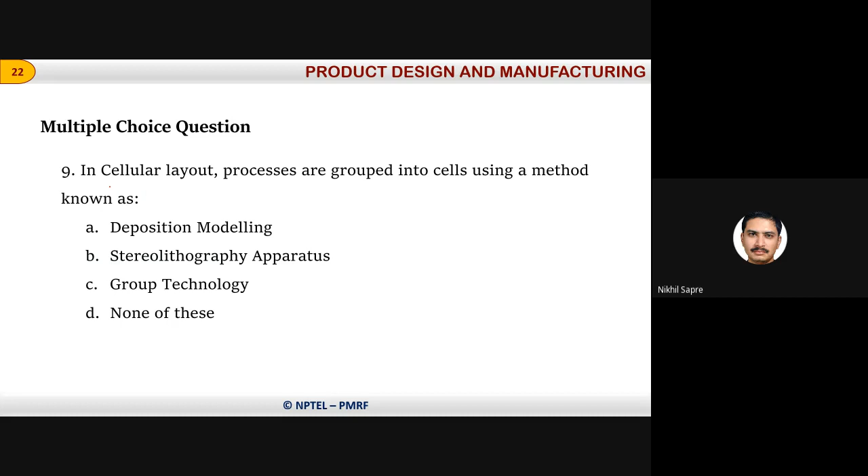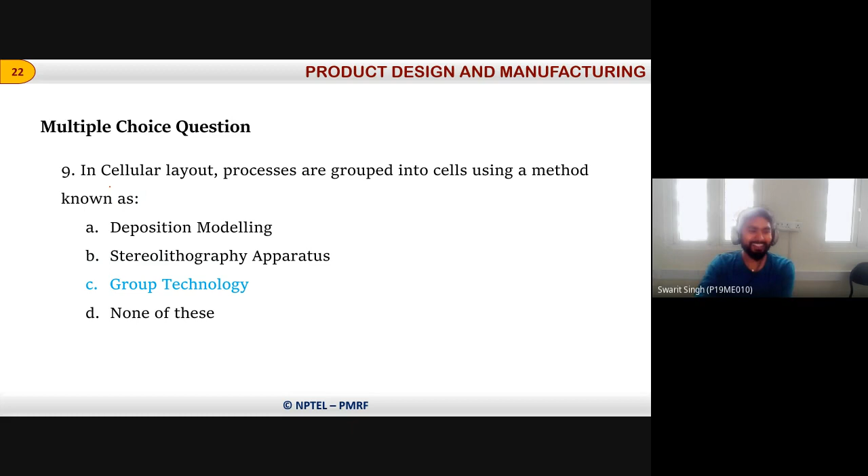Question number 9: In cellular layout, processes are grouped into cells using a method known as Group Technology, obviously. So it is a very simple question, right? It is there in the group technology.

If you choose the course of optimization, line balancing is one of the chapters only. So these are all the questions we have to discuss today.

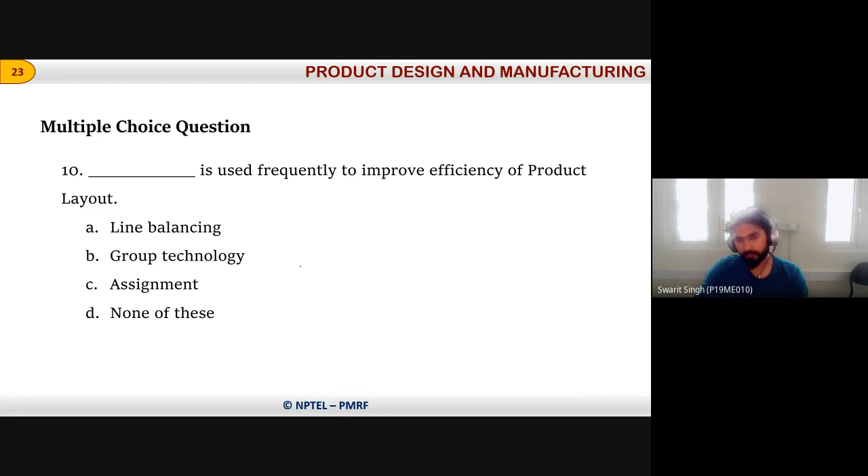Now, one question is asked this time. I just wanted to mention - it was not a very big deal, it was not a big question, but here you have to understand - you guys are going for examination, and then solving the assignment, you have to understand the thing.

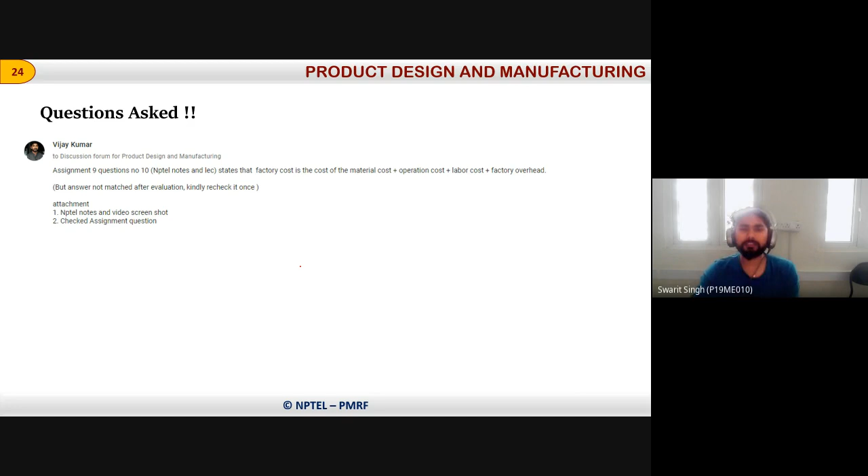So Vijay Kumar asked that in assignment number 9, question number 10, there is some problem. He said factory cost is the cost of material cost plus operation cost, labor cost, factory overhead, and something like that. But his answer was marked wrong. So the question was like this: it says factory cost is material cost and this...

He marked it true because it is covering all material cost, operation cost, labor cost, factory overhead. So factory cost is always the sum of material cost, operation cost, labor cost, factory overhead. So he marked true, but the answer was incorrect, and the correct answer was false. Are you able to identify why it is false? Or have you got the answer for this?

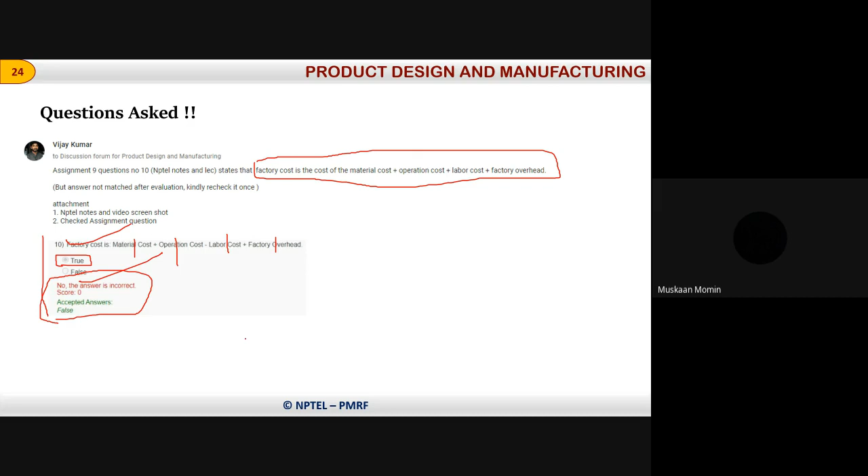Because there is a minus in labor cost. Correct, correct, yes. So this is a very small minus, but because of this small minus, one mark - he got one mark less. So in the examination only, final.

Okay, okay Nikhil, no issue, you can go. So in the final examination, just look at it carefully. Keep in mind that you should not make these kinds of mistakes. These are minor mistakes which people used to do. So you have to read the question very carefully.

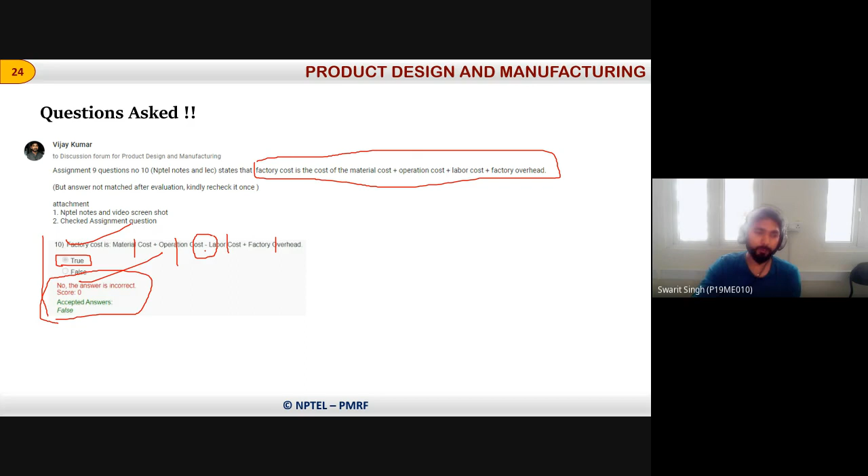Like we already discussed about 'not' statements - if the statements are negative, then you have to think negative. So about that particular statement, you have to read it with 'not' in mind, so the answer will be like that only. If some properties are listed and it's written 'which are not the property', you have to find which properties do not belong to that. So this kind of question may come.